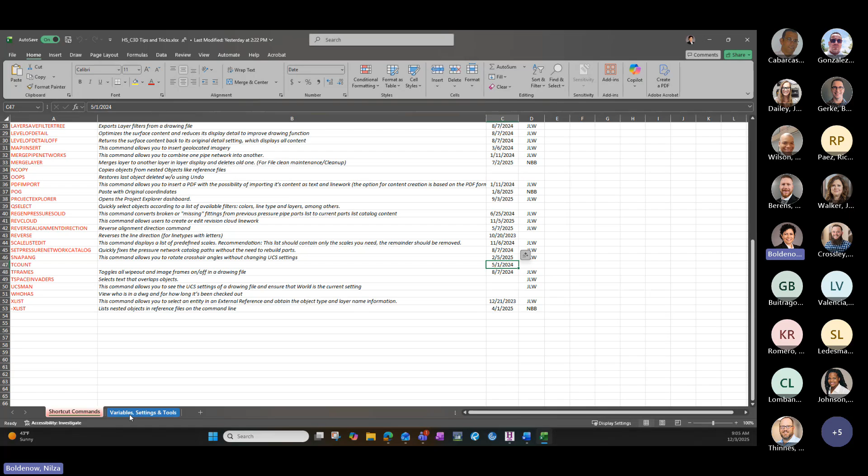Let's go through the tips and tricks real quick. For those of you who have not seen this before, we have two tabs down here: one with the shortcut commands, and the other with the variables and settings and what they do. And then we have the meeting content Excel, which is very handy for those of you who have not seen this.

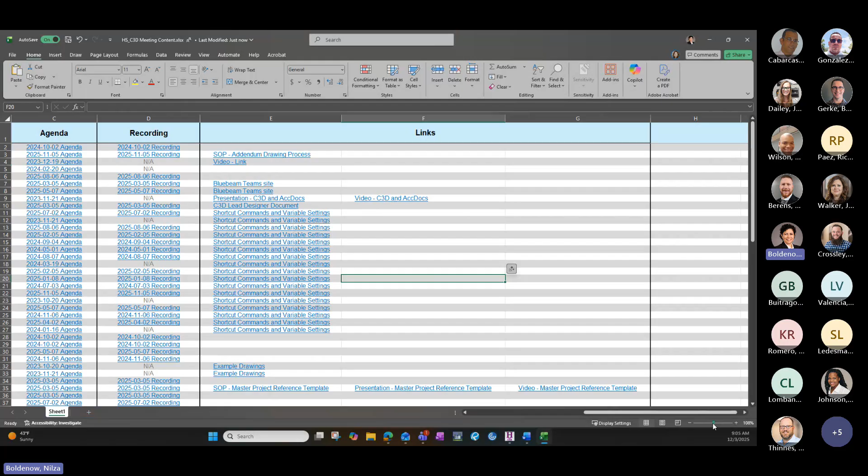So this is basically organized by date, and all the topics that we are discussing, with links to the agendas, links to the recordings, and any links to shortcuts and variables commands. So if you're looking for a particular topic, like how to pressure pipe, curved pipes, or anything like that, this is a good place to start. I'll make sure you guys know the new locations of those.

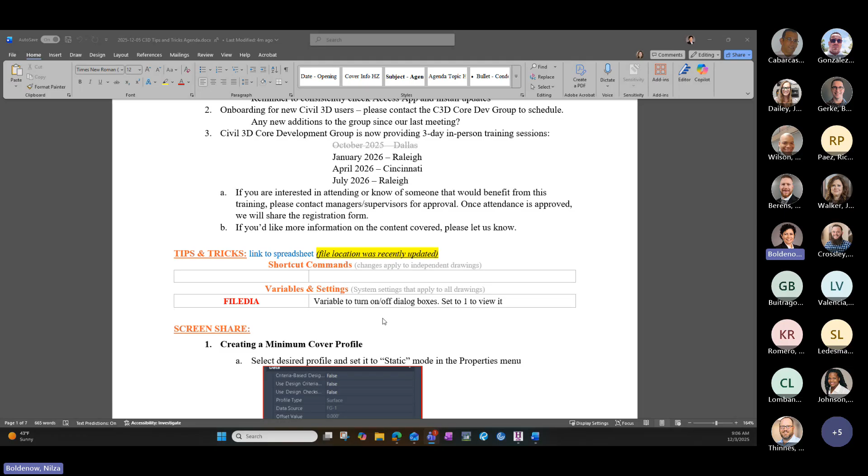So the first one we're going to cover today is FILEDIA. It's a variable in Civil 3D that turns your dialog boxes on and off. Sometimes this gets turned off when AutoCAD Civil 3D crashes. So I wanted to share that in case you're in the program: if you type in FILEDIA, the variable is 1 or 0. 1 turns on your dialog boxes, but sometimes it jumps to 0.

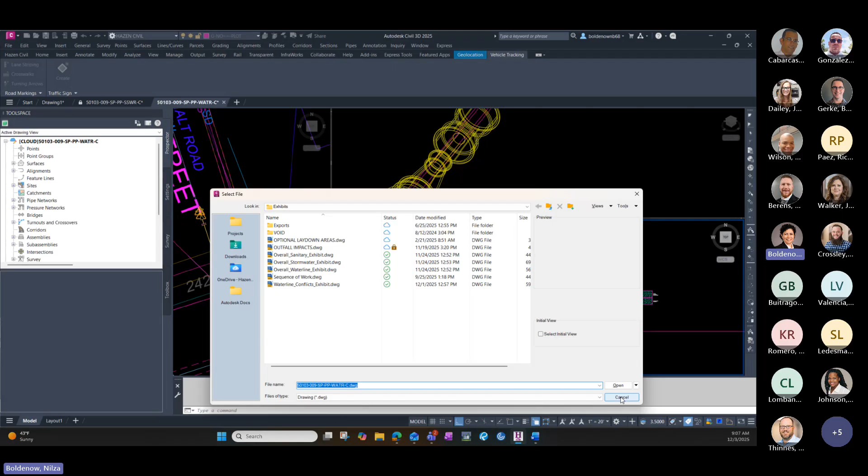I don't know why it's doing it. So if you hit your open icon, you won't see your dialog box, you'll see a command line. It says where to go open your drawing, right? This is the indication that your dialog boxes aren't working. So you set FILEDIA back to 1, and now the dialog boxes work.

Screen share for this month: I wanted to cover creating a minimum cover profile and how we do this at Hazen, setting the style for it and lowering it to the desired depth. This is mostly needed for water, making sure you're designing your water profiles to a minimum depth. So I wanted to go through that with you.

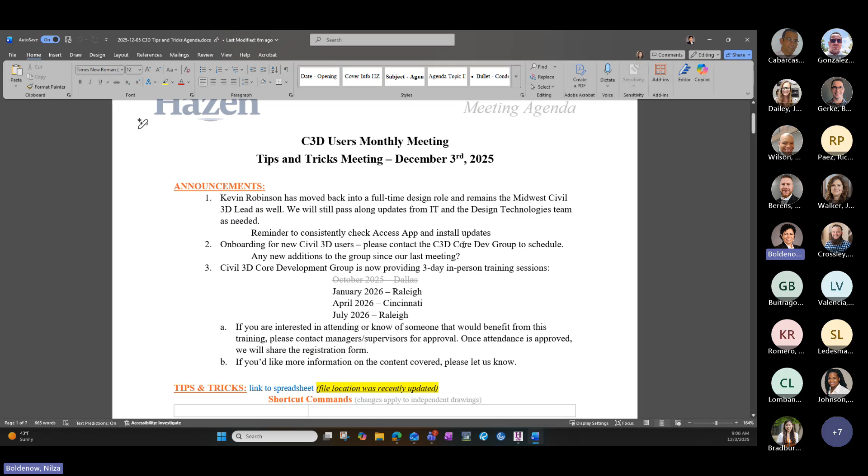The commands are all through here, so I'll walk you through them. If you want to go step by step, you can open up this agenda. Let's go through that together here. So if I have a finished ground, right? I'm going to move my screens here, give me one second. I'm going to move my properties because I'm going to need this docked.

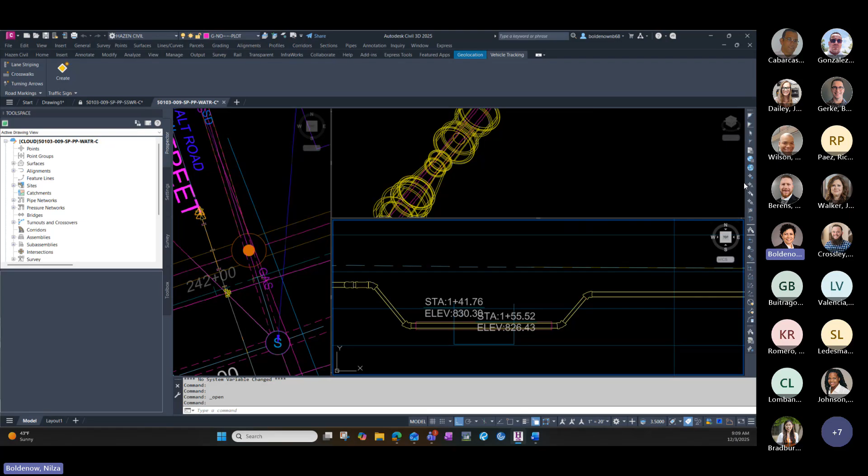All right, so I have a finished ground and an existing ground. I am going to select these, and these are coming from the surface, by the way. I have an existing ground and a finished ground that are data shortcutted here.

First of all, I want to take my finished ground. I want to use my finished ground to make sure that I'm going a certain distance below. I don't want to use the existing, I want to use the proposed finished ground. So first I want to set that to static. Dynamic is where the surface will follow, the profile will follow whatever changes are made to the surface. But temporarily, I need to change this to being static, meaning I can change any PVIs right now, okay?

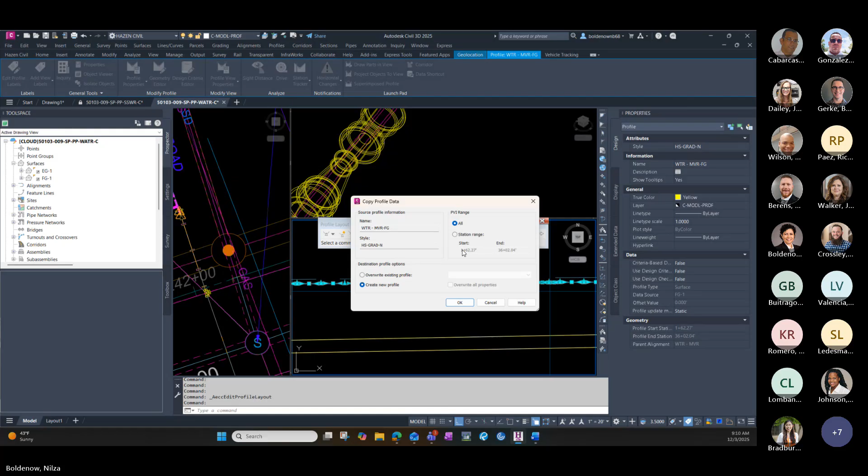It's going to give me this window here to be able to modify the profile. So I'm going to hit Geometry Editor, and I'm going to copy this profile to create the one that I want to lower. I'm going to hit OK here. So it's copied the profile right on top of this one.

Right now, by having my selection cycling turned on, which I'll go through with you real quick - if I click on this and make sure my selection cycling is turned on down here, I can click on the profile and it's telling me that I've got two. If you pick the top one, that's the one you just copied. So I'm going to select that one. This is giving me the indication that the copied one is on top.

So first of all, I want to change that to be the profile that I'm creating. I'm going to call this a water dash, give it a name with minimum cover. You can use whatever name you need here, but the biggest thing is that you want to label it somehow that this is a minimum cover profile, okay?

Here is where you want to change the style of it. We have styles for minimum cover - we have existing, new, and minimum cover. That's the style you want to use, okay? While the profile is still selected, you can see how the style has changed in color.

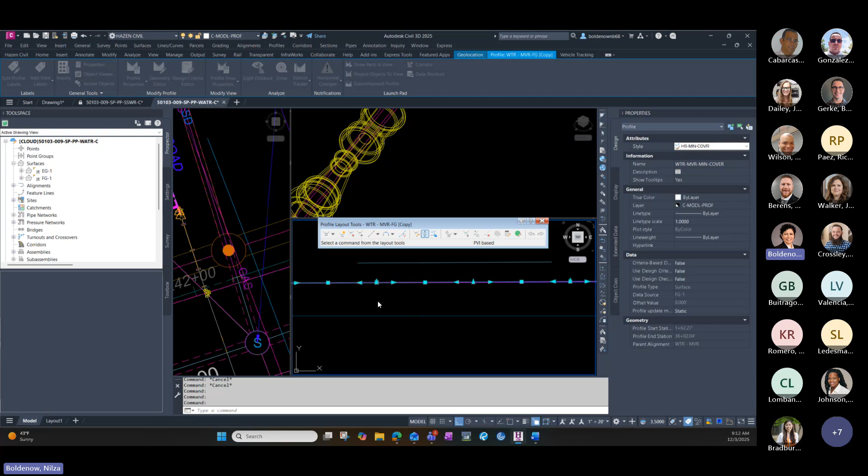While the profile is still selected, I'm going to select the icon for moving the profile, raising it or lowering it. And here I want to make sure that I am 4 feet below cover. So I'm going to hit -4 feet, okay? And it's going to lower the entire profile 4 feet. That is my minimum cover for designing this waterline.

One thing that we're not done with quite just yet here is that the surface profile for proposed ground is still set to static. This needs to be changed back to dynamic so that any changes that are done to the finished ground get updated. If this is not set back to dynamic, these changes won't happen. That makes sense?

This one can stay static. If you try and change this back to dynamic, it'll snap it right back to the original elevation. Let's set that - see that? But you'll have to go through the whole commands again of raising it and lowering it. This one can stay static. Any questions on this?

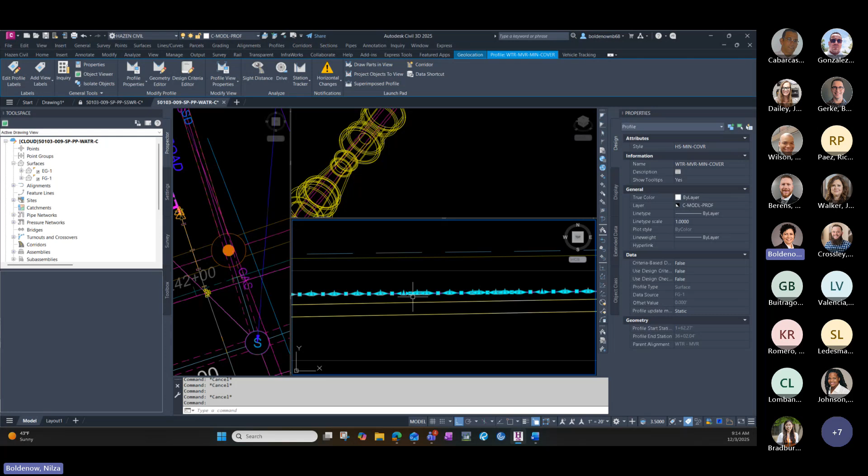Not a question, but if you are going to be changing that finished grade often, it's still going to be good to set that back to dynamic and then move it back down so you're getting your most updated offset. That's true - so what Brent is saying is that if this is changing all the time, set it back to dynamic. It'll snap back to its original and then lower it again, so you can see that you're still below that minimum cover.

And this is, I mean, we use this for water, but this really could be for storm, sanitary sewer, any kind of depth that you're trying to achieve a minimum cover for. That's a good point, Brent. Any other questions here?

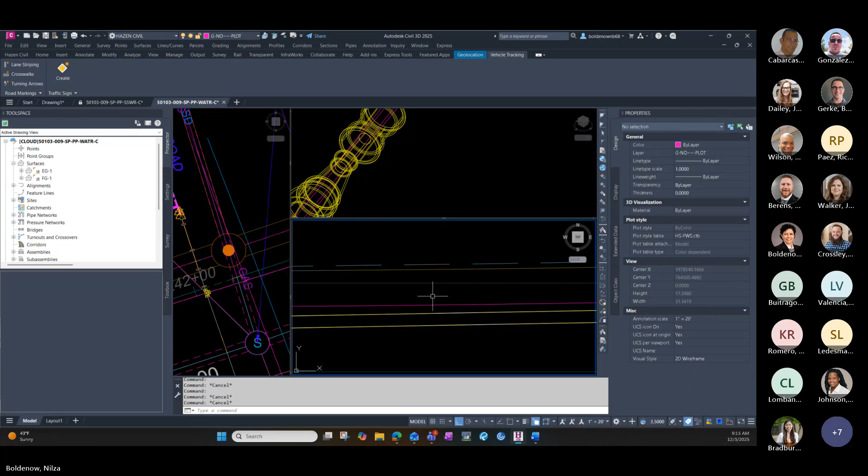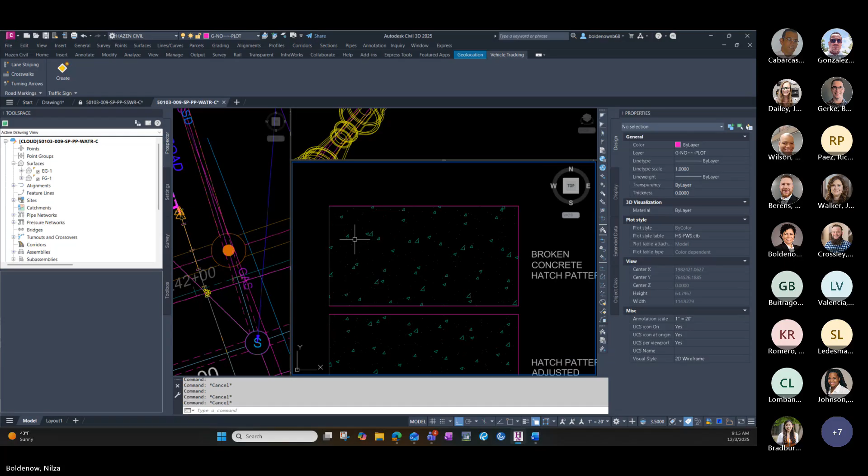Another thing we wanted to cover today was the hatch patterns. We are seeing a lot of hatch patterns on details and so forth with broken hatches. There's a quick and easy way of fixing this.

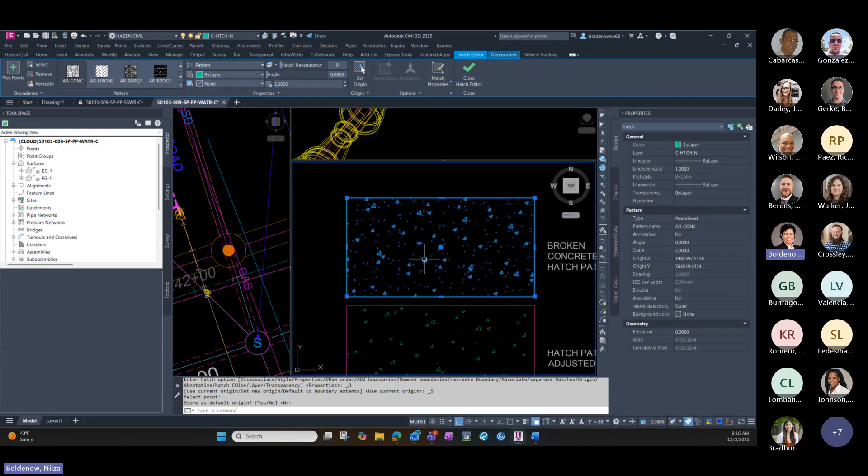The reason why you see the broken hatches is because it's in architectural units, the concrete is, and all we need to do is just set the origin of the hatch somewhere near - doesn't have to be an enclosed object or whatever, just somewhere near where the hatch is at, and it fixes those to be enclosed. Have you guys run into this?

Yeah, yes, I haven't seen that so much here, but we see this quite a bit in details. So that's why we want to make sure everybody's aware of how to fix that.

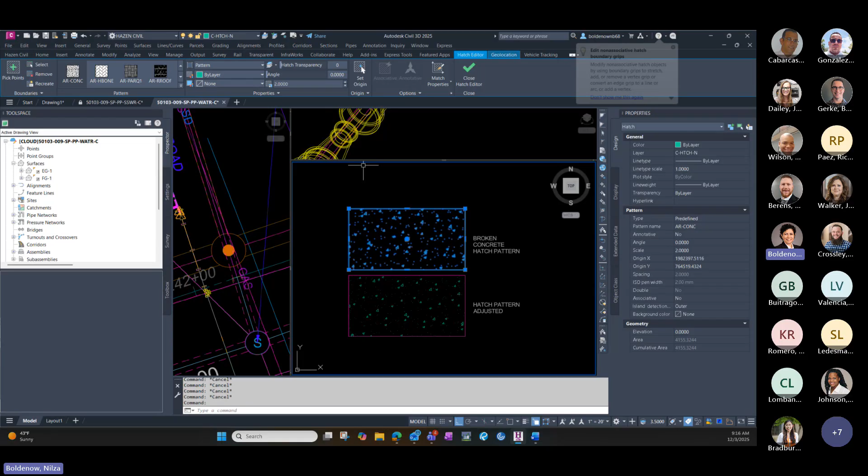Okay, all right. And now the third part, Jessie's going to show you using the Reference Manager to fix broken file paths.

Everybody got my screen? Okay, all right. So we're going to talk about broken file paths and how we can change these. I want to preface this: this is not meant to be a tool we use to cut any corners. This is more of a tool to fix a handful of broken links. But there is software that can help with that, outside of the program.

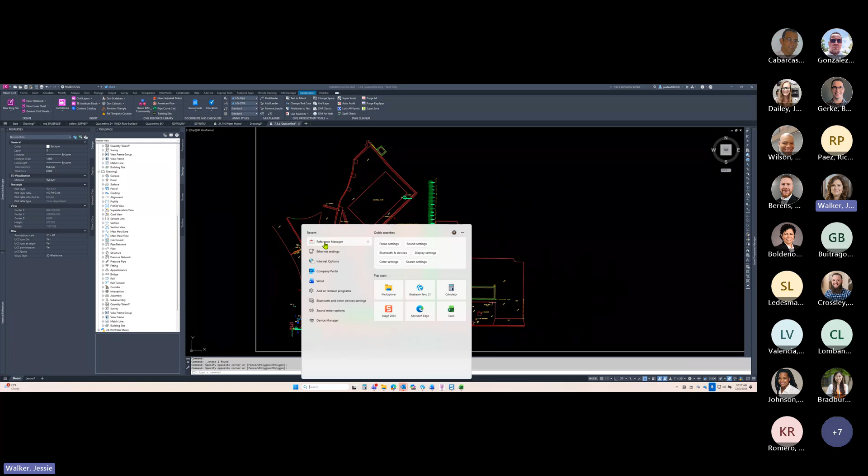I don't know if anybody has used this, but it's called Reference Manager. So if you have drawings where you've run plan production tools and you need to go back and readjust your XREFs, because the XREFs are broken when you open the drawing, this is a tool to help with that. So what we want to do is go down to our search bar at the bottom and type in Reference Manager, and you should get this pop up.

So this window is completely empty right now. We haven't selected anything, but what we're going to do is select the drawings we want to change. So if I know all my grading drawings have a broken base file, I could say add drawings. I'll get another pop-up where I can select as many files as I want.

And for this I'm just going to use the civil drawings for this project. So I'm just going to select all of them and say open. It takes it a few minutes to pull resources sometimes, especially if this is ACC Docs and it needs to go get the references downloaded.

I typically say only first level XREFs, because I'm only worried about what's actually in that drawing. I select this every single time — you'll have to reset it each time you open this app, so it's up to you. If you plan on doing more than one process, you can set that to default.

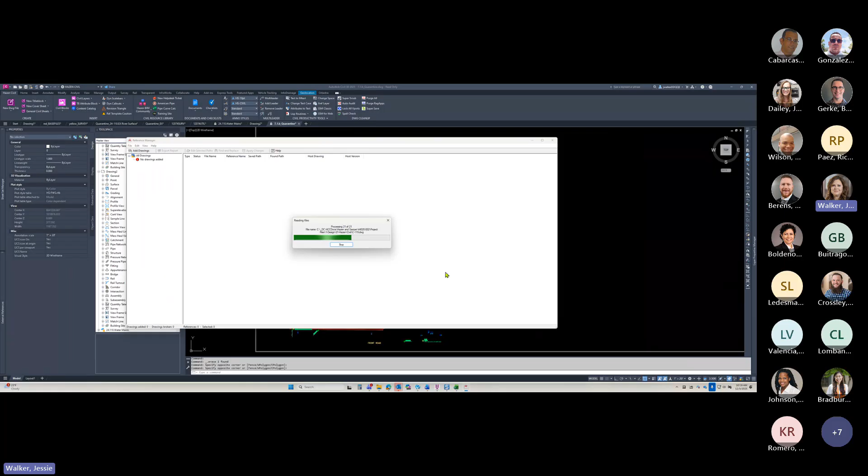So it's pulling the files. I've selected 21 drawings that I want it to check XREFs for. Once it finishes processing — and the more drawings you have, the more time it takes to sync — you'll notice immediately it gives us a list.

We have file name, reference name, saved path, found path. So this is what's important: saved path and found path.

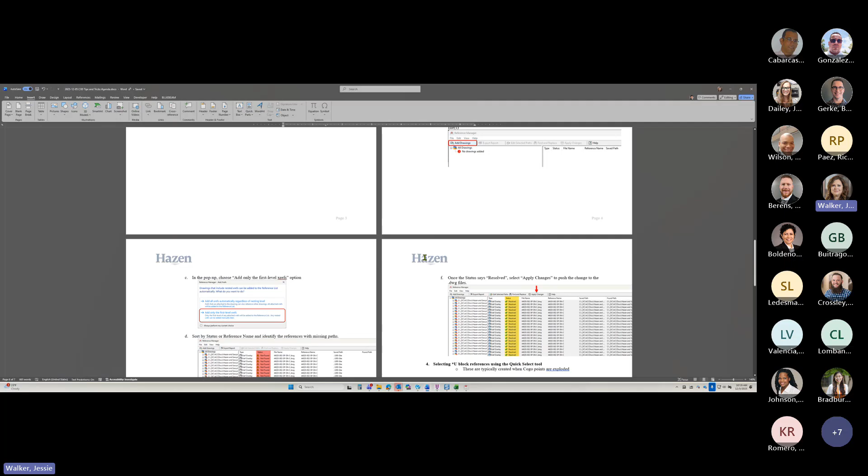The ones that are not resolved — if I hit status, I'm going to see a question mark, right? Or sometimes it shows as not found. In this case, it's telling me it found it in a different location, okay? So it's either not found or found in a different location.

So I'm going to select the broken ones here. Actually, I'm going to sort by file name, because I know it's my SPSNC base file that I need to repath. But it's going to give you everything — shape files, text, plot styles.

Now if you're using a page setup override when plotting, you don't need to necessarily worry about that. I'm mostly looking for XREFs that are broken. So these 'not found' entries are what I need to fix. We have a saved path and a found path — the found path is missing, which is why it says not found.

So if I select all of these, hold down shift and double click, it'll get a pop-up box, and it's telling me the new saved path, right? So I can now set that. I'm going to go to my project and set it to the new file path location — it's going to be my 000 site.

When I hit OK, it will say resolved. You'll notice it has a little pencil next to it, which is hard to see, but the resolved ones are what it found when it opened these files. The resolved with the check mark and pencil means we haven't applied the changes yet. So we've found the path, set the path, and now we can apply the changes.

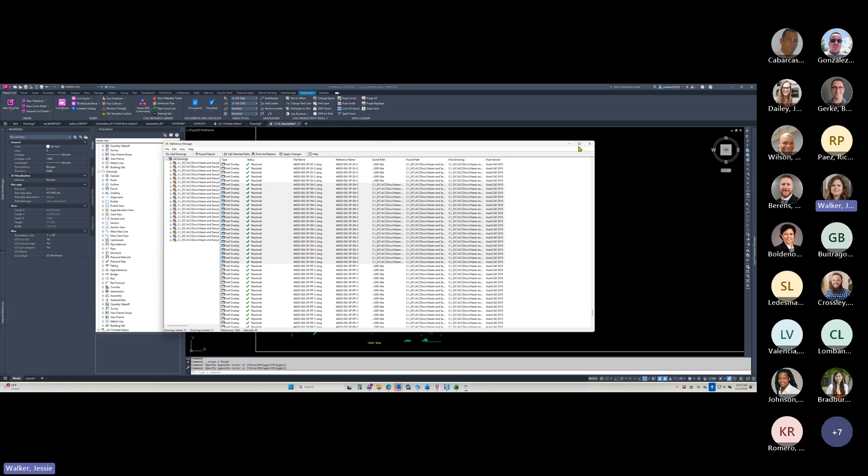Has anybody used this tool before? I have. It's handy, right? Yeah, me too. Good. Used it after we had to change paths on 100-some sheet files, so it saved a lot of time.

If you split it into phases and you have different folders and now your files have moved around, you can quickly repath them. So this is to repath, Jesse—sorry, go ahead. It's to repath just the same file name correctly. It's not going to repath a different file name. Correct, it would be the exact same file name.

We're not trying to point it towards another file. That's not what this tool does. It just recognizes broken links and allows you to fix them without having to open a drawing and do it independently. Yeah, that's a good point, Nielsa. Okay, any questions on that?

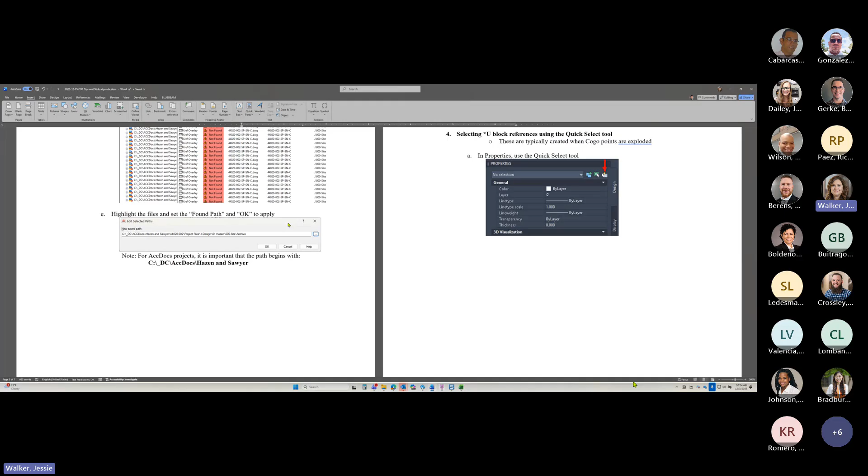Okay, the next thing we're going to talk about is those lovely U blocks, the asterisk U blocks that happen when we explode Cogo points. Typically, depending on the size of the project, you could have thousands, right?

Identifying these U blocks, we can use the quick select tool for this. I don't know if anybody has figured out the workaround to grab them all at once, but Paula Glassford and I were on a project and we just kept messing with it, and she finally figured out the code to grabbing all of these at one time. So basically, we would use the quick select over here in our properties.

We would set our object type to block reference name. Operator is going to be wildcard match. The value is asterisk, capital U, asterisk. The capital U is important because if you have a lowercase u in there, it's going to grab any block that has the letter U in it. So the capital U is important.

What that does is grab all those block references. In this case, I only have 238 U references. You can go through this process and keep doing it until you don't have any more U blocks in here. So: block reference name, wildcard match, asterisk U asterisk, okay. And it tells me I have 345. So you just keep doing that process until you get rid of it, but it's a quick way to get them all out of the way.

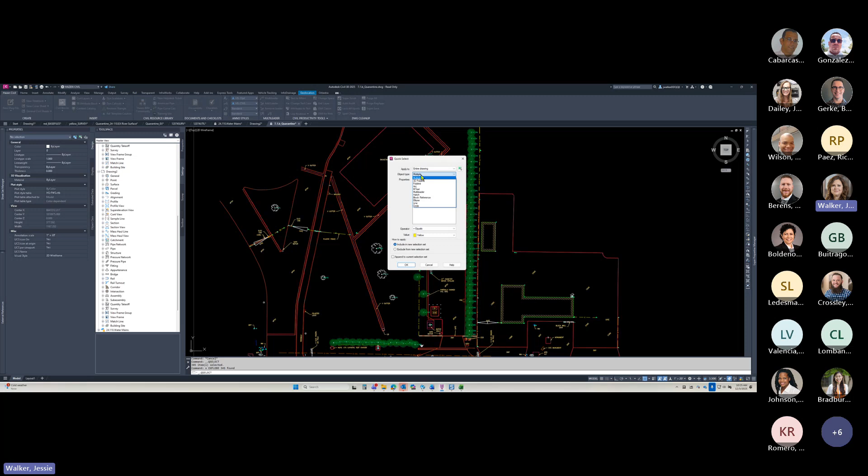We want to get it down to these blocks, and then we want to replace those blocks with our Hazen blocks, right? But we can do that once we get down to the same block. Now, we don't want to explode these blocks all the way down to just line work and text. We want to have something that we can swap out, but filtering through those U blocks, we can do that quickly with our quick select tool. So anybody have any questions on that?

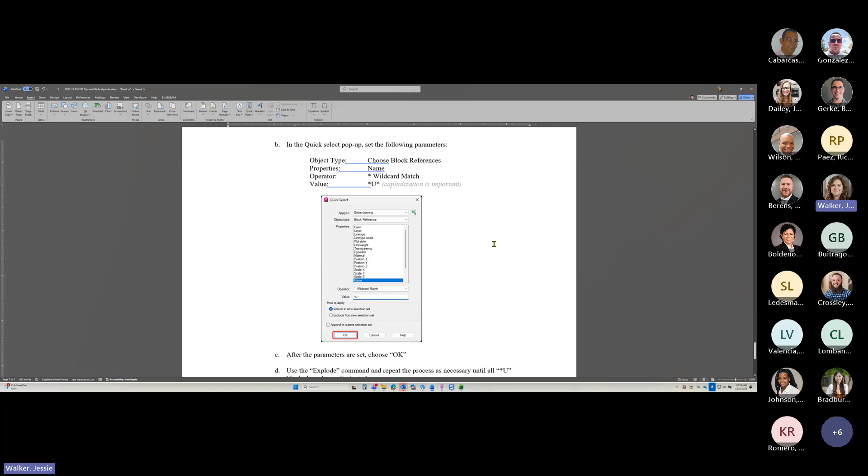Okay, all right Neil, so that's all I had. That's definitely a good tool to have. Yeah, it helps us go through that process pretty quickly instead of just dragging it on. And obviously you have to grab those blocks and put them on the correct layers, which we have to do anyway when we're doing survey cleanup. But you can do this process a couple of times and then you're down to your blocks. Okay, good point, thank you.